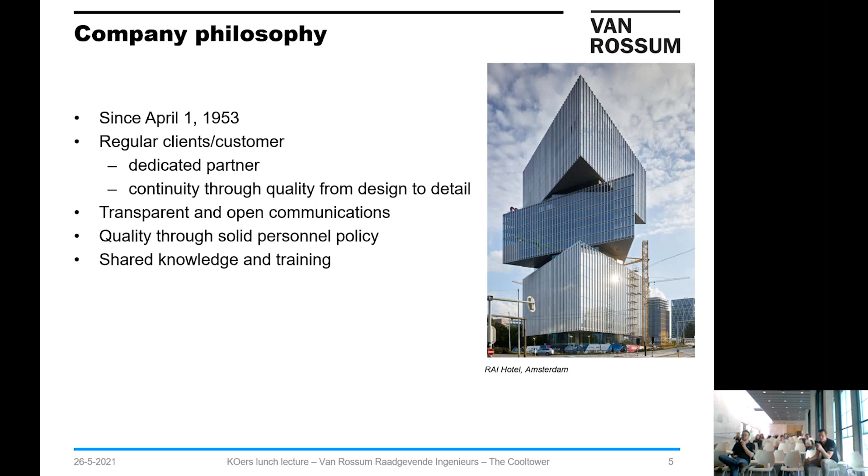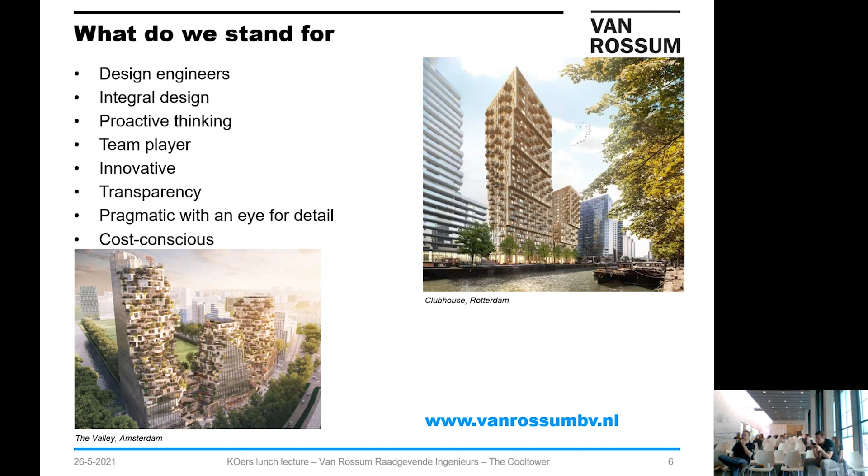In the company we can do trainings, and there is a lot of knowledge to improve and get better in any field you would like in engineering. As engineers, we are doing the full package of structural engineering. We do the design, but we also advise during the construction, and we work together with the architect, with the client, and with all the different subcontractors to achieve the optimum in design, but also in cost and efficiency. If you want to know more, you can go to our website and see everything you would need. And you can always contact people from the company.

My experience. As I said, I come from Greece, so when I started working in the company, I started in English. I got full support from the company on that, and now I do everything in Dutch. We always have young colleagues with whom you can do external activities. You can do drinks. But we also have experienced colleagues where we can always ask questions and learn from. Anything you have in mind, you can ask it, and there will be someone to help you with that.

What I find very interesting at Rossum is that from day one, you can start from the most simple thing, like calculating a beam, or even archiving some drawings, and then the other day you can work on a very complicated tower in 3D and make calculations on that. This variety of responsibilities is very important because you learn a lot in very little time. You have the opportunity to work on many different projects.

For me, for example, when I started working on Ponsteiger, I made the load and stability calculation of the lower part, which was very impressive for me at that moment, and still is. Then I also worked on a school, the Retail Academy. It was an expansion. And also on a villa 250 years old where we did the whole restoration. So you see there are many different projects you can work on and many different skills and knowledge you can acquire from that.

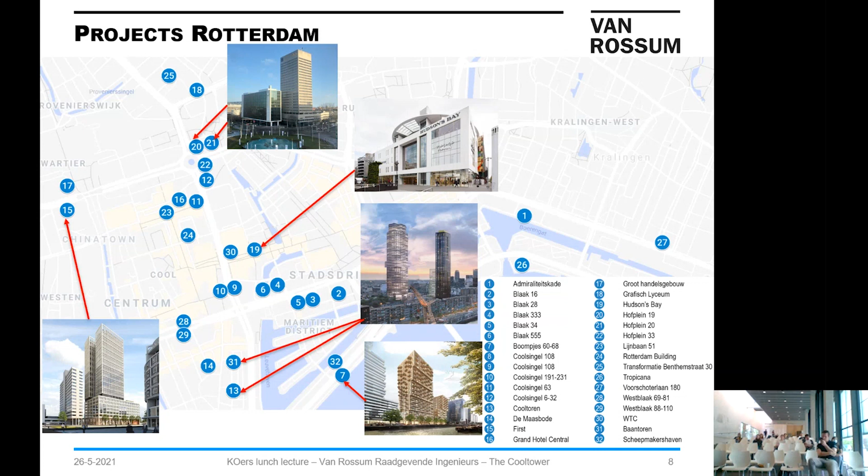And now the CoolTower. The CoolTower, as you can see, has a very interesting silhouette in the sky of Rotterdam. There are different buildings now being built in Rotterdam, and this one stands out because the form of the facade and the form of the building is different. You can also see that the facade starts from the top and from the lower part as light, thin elements, and ends up in the middle with thick elements.

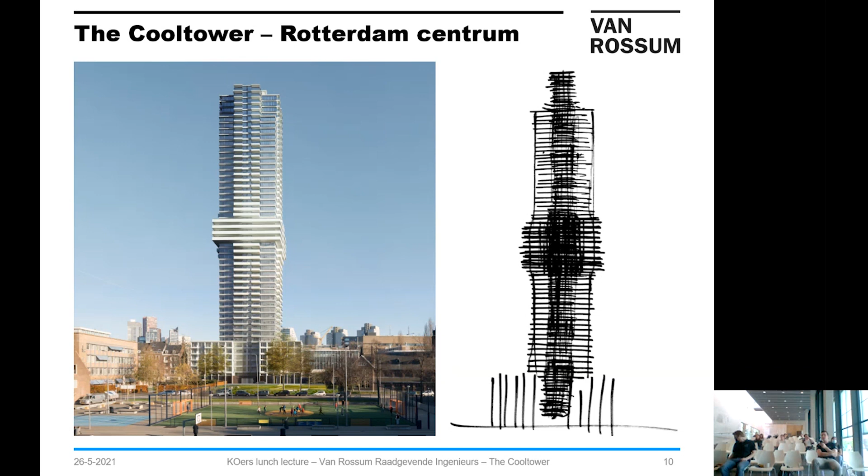And this was actually the goal of the architect. This is the first drawing of the architect, in which you can see that it's very dense in the middle. The idea is that the average height of the high-rise buildings in Rotterdam is around 75 meters, and this is the middle part. So he created there a sort of point of reference for the average height. And this is actually being built, and he achieves that through the thickness of the balconies.

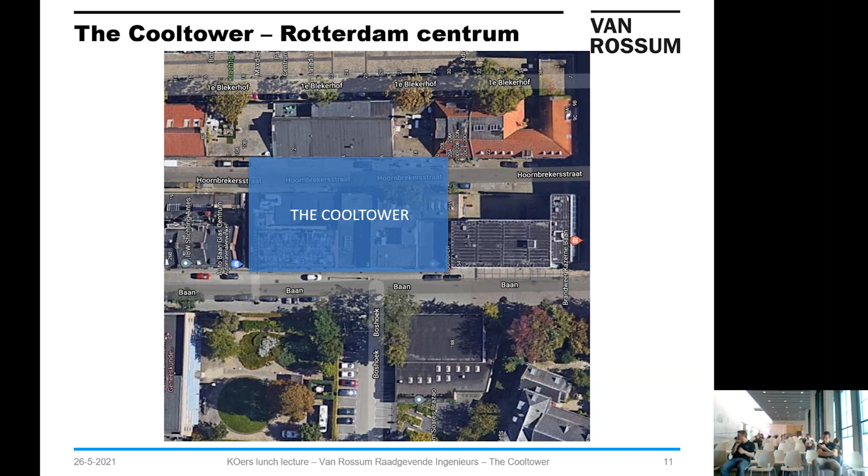It is located in the area Cool in Rotterdam. That's why it's called the CoolTower, besides being a cool project. It's between the streets Baan and Hoornbrekerstraat, and you can see that it's above Hoornbrekerstraat. So there was a need to create a construction, which we're going to talk about very soon, to transfer the loads above the street. The area is now being really developed, and there will be many different developments in this area. You already know that we're also going to make the Baantoren. It's next to the CoolTower, and the area is going to change completely.

And at Rossum, in every phase we always work with one project leader, one structural engineer, and one draftsman modeler. But these people change in every phase. So 4 years ago, when I started with the project, I was doing the calculations, and now I'm doing the project leading during the construction phase.

Some data of the project: it is a residential building. It is made out of concrete and steel, mainly concrete, but there are also some steel elements that are main structure. Total height is approximately 155 meters. And the completion date is mid 2022, and now they are almost in the middle of the construction. So they have a lot to do yet.

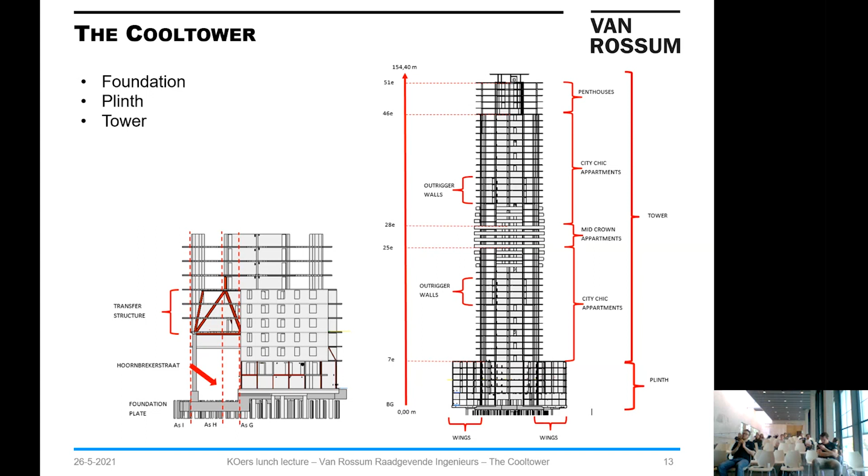The main characteristics of the tower are the outrigger walls, which are part of the stability system. And from the plinth, at the left side, you see the transfer structure I was talking about, which goes above the Hoornbrekerstraat, and it's necessary in order to create a clear path for the cars to go through.

The foundation, you see on the top, the form of the plate is a bit weird to have like that, but it was necessary because at the location of the Hoornbrekerstraat, there are a lot of cables and a lot of installations that we couldn't remove. They had to go on during the construction, so we had to create the pour in this way, and that's why we made this form of the foundation plate, which is 2 meters thick.

Then you see on the lower part all the piles, which are placed in the whole foundation. There are in total 167 piles. Most of them are in the middle part, in the foundation plate, and there are 3 left and right at the wings, which are the parts that are cantilevering from the tower.

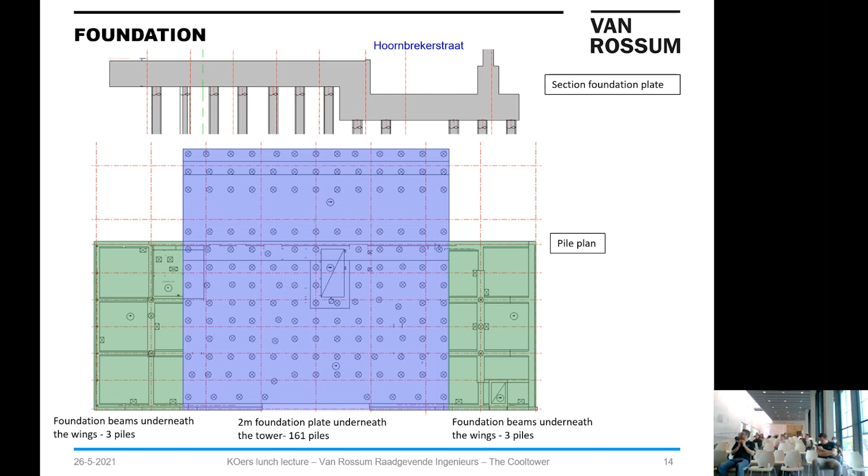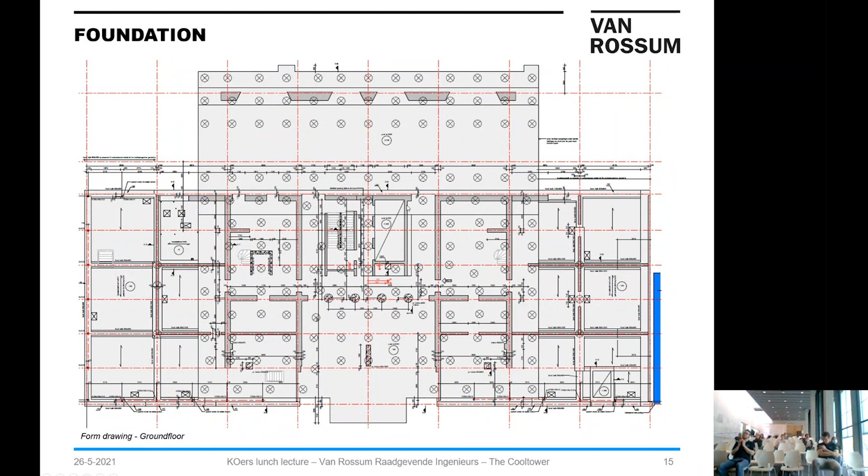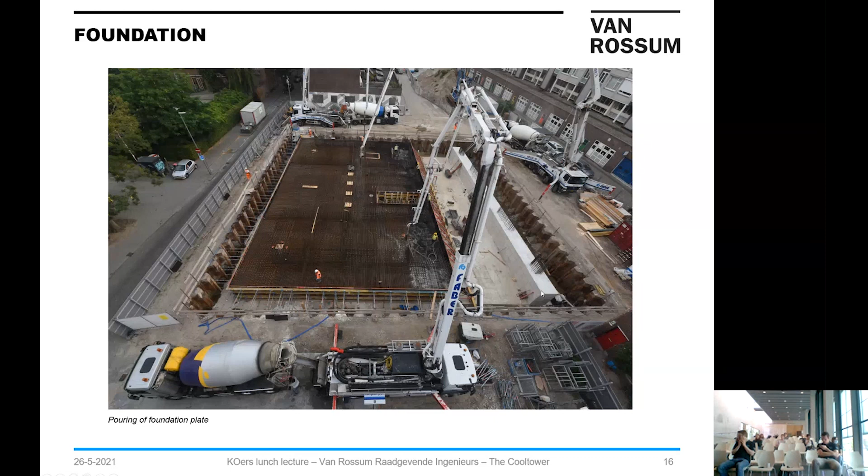Some facts: the concrete foundation is 2 meters thick and it's 31 by 31 meters. In total, 167 piles, as we said. It has a pile length of 55 meters, which is almost 1/3 of the building also in the ground. You see here the analogy in the height. And the load capacity of every pile is approximately 8,000 kilonewton.

Probably my colleagues already know that, but I don't know if the students understand the amount of this mass that comes on a pile. But I made a small analogy, and you can see here that a fully loaded Boeing is around 300,000 kilos. So a pile can support approximately 2.7 Boeings. So you see, every pile takes an incredible amount of loads.

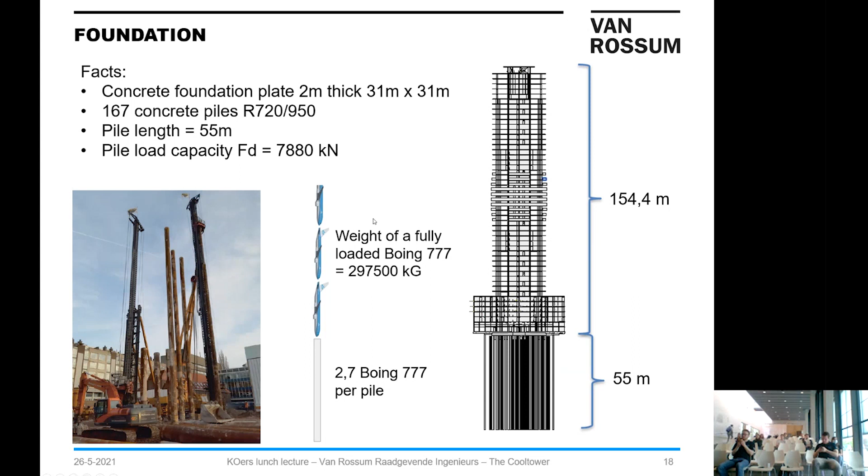We move to the plinth. The goal of the architect was to create a facade where you could see that the left side and the right side are different, and the idea was he wanted to keep the same form from the previous construction, and he actually achieved it.

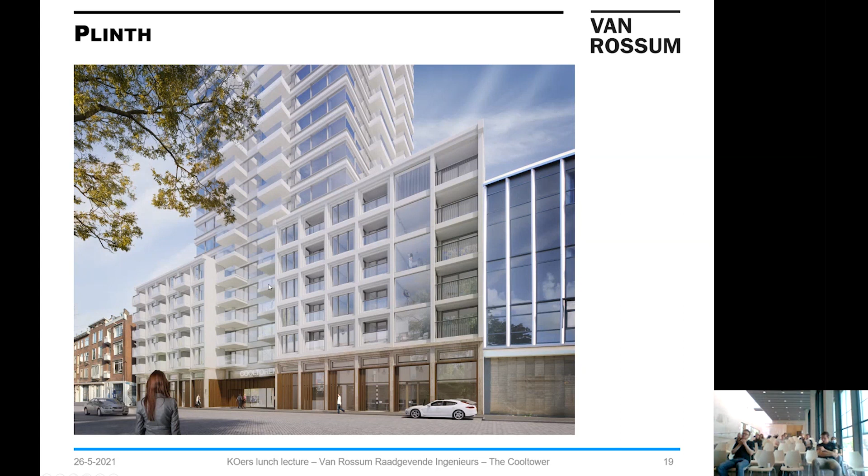Here's what I was telling before. So we have on the left and the right the wings of the plinth, and through the cantilever walls, which are the green ones, they are connected with rebars through the walls and through the floors, and they are hanging from each other. So they are holding themselves in place, so they will not collapse.

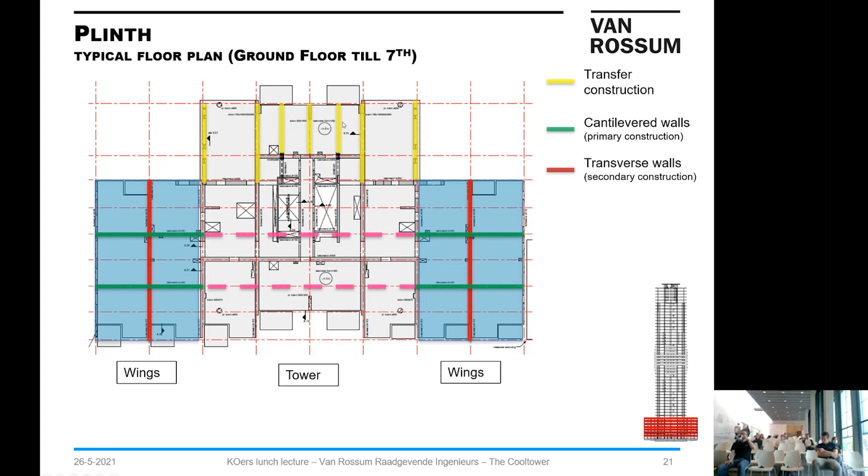And the idea of that was because we didn't want to have a difference in the deformation between the tower and the plinth, because the tower is 50 floors and the plinth is only 7 floors, only 21 meters tall. So there will be a difference in the deformation, and also we didn't want to affect the buildings next to the plinth, and that was the solution we found, and it solved this issue.

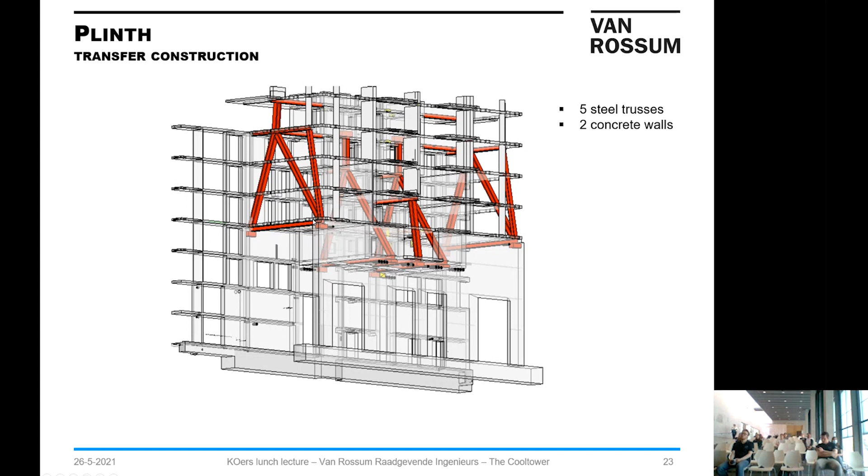This is the transfer construction we discussed before. So you see there are trusses that come above the street, and they take all the loads from the columns and bring them left and right to thick walls, so that we can have access through the street. The main idea of the structure is that it takes the loads from the columns and transfers them to the walls. This is how it works in the normal situation.

But we also did research, and it's necessary in this kind of building, on how the trusses will function if one part collapses. So in this specific case, if this beam collapses, we see how it's going to transfer the forces to the tower on the top here and on the bottom, and then we had to reinforce and calculate the elements based on these forces.

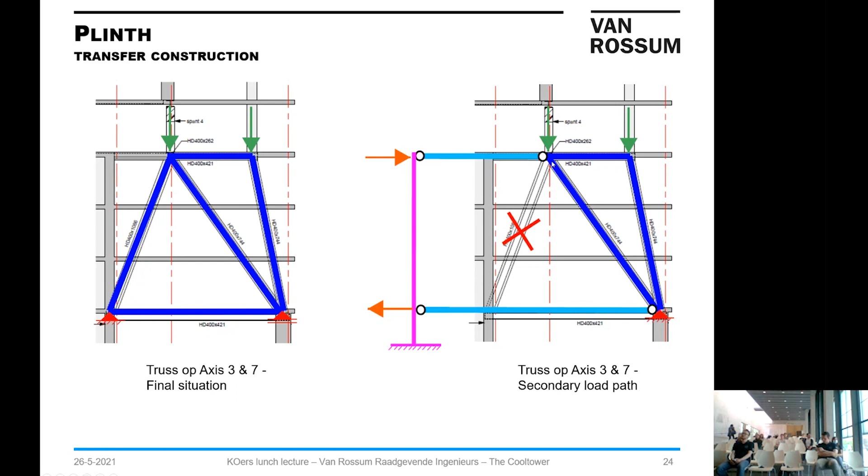So we also have to think about these scenarios during our work, not only about just making calculations of the normal situation, but also what happens in case of accident, what happens during the construction phase. All these kinds of parameters, we take them into account.

One nice part of our work is that we can design it ourselves, and we can see it being built. That's what I find very pleasant and very satisfying, when you have worked really hard and really enjoyed it, and you can see this being built and you enjoy it.

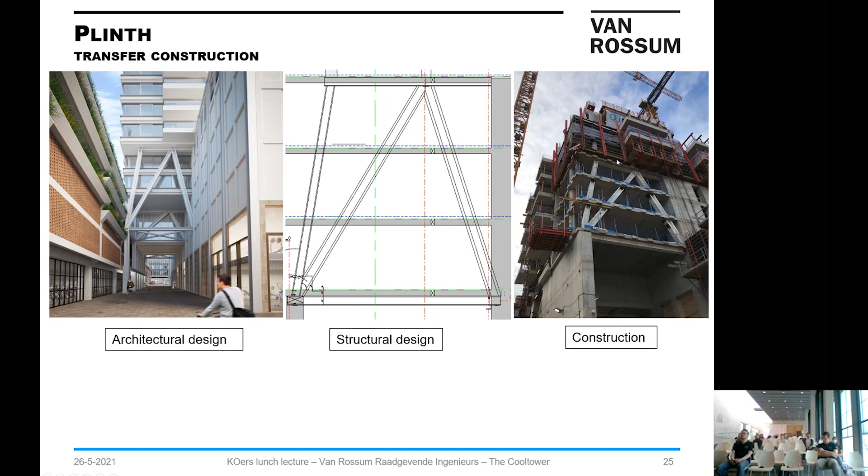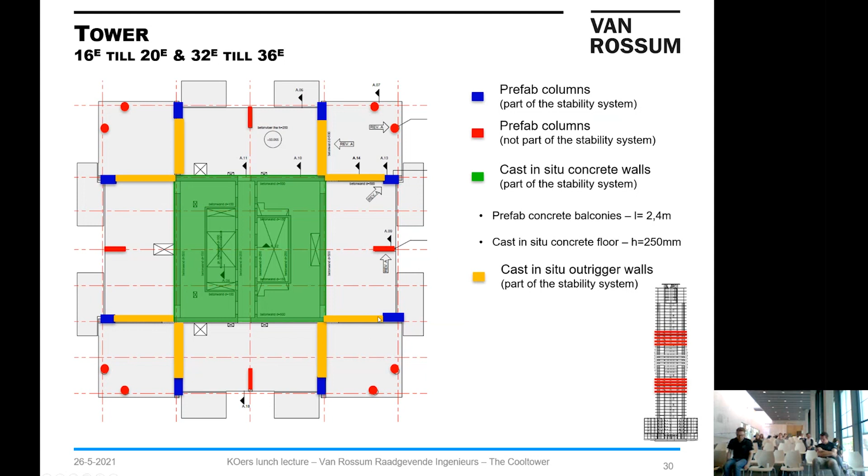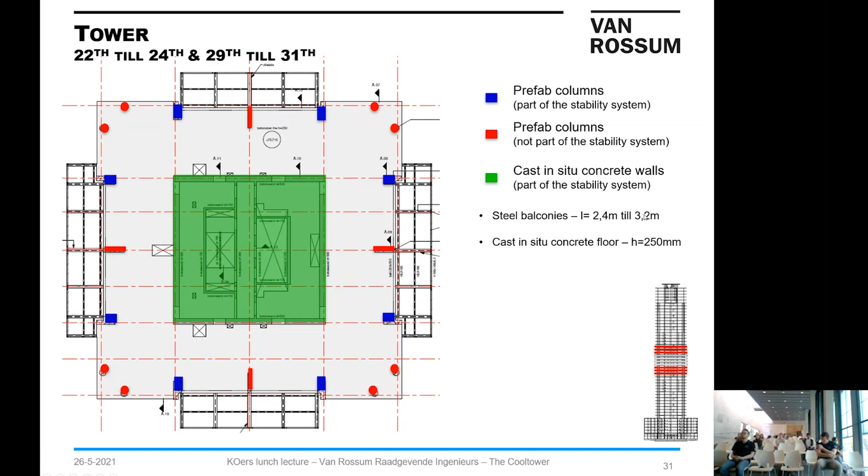As we go higher in the tower, you see these are the levels with the outriggers. Here, the yellow ones are the outrigger walls that are used for the stability system. Then we reach the middle part where we have the mid crown, that's how we call it, and above and below the mid crown there is also a different floor plan where the balconies become steel because of the length of the balconies. It wasn't possible to make them in concrete, so we decided to make them in steel. And the rest of the construction remains the same.

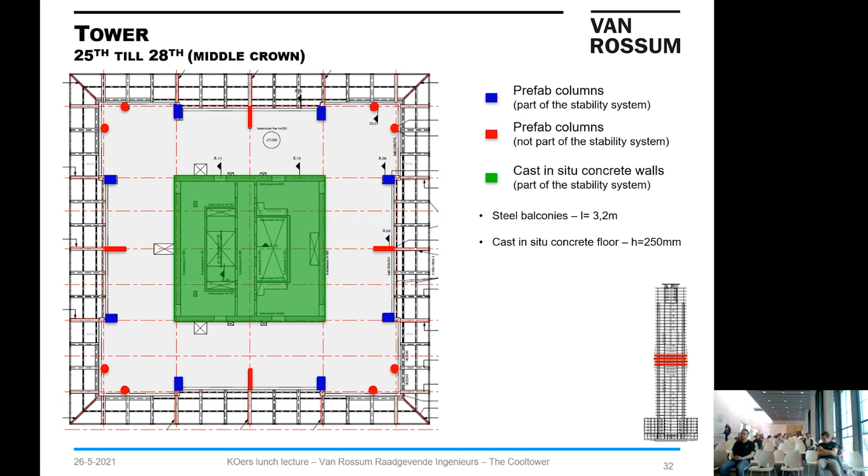And then here we come to the middle crown, which was the main idea of the architect, to create this kind of ring around the building, so everybody can see this dense line in the middle of the construction. Again, because of the length of the balconies, 3.2 meters, we had to make them from steel. The difference is that in these floors, we had to add extra beams on the edge of the floors in order to support the balconies. But further, the construction remains the same as the floors below we discussed.

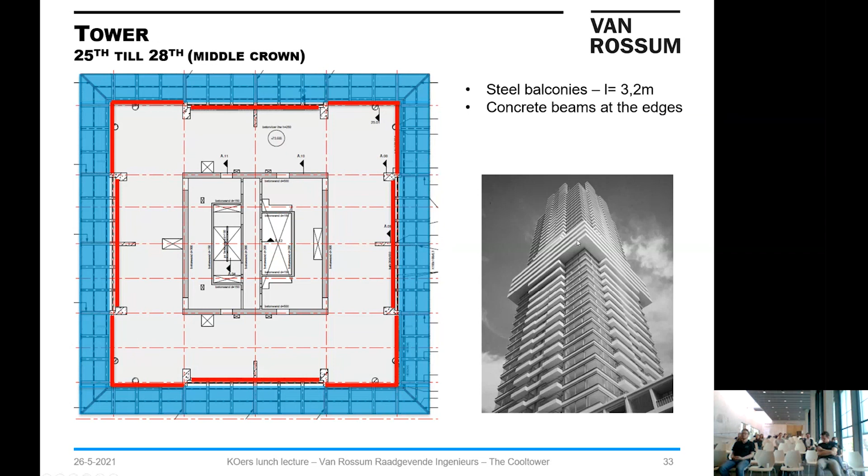Above the outriggers, the columns are not stability elements anymore, and that's why you see that they also become much smaller. They also don't take so much load compared to the lower ones, so the dimensions are getting smaller, and that's also good for the contractor and the client, because we also think about that. We have to think about how to make it smaller and more efficient. That's the idea behind this. And you see that although the form remains the same, you have many varieties and many differences in the construction.

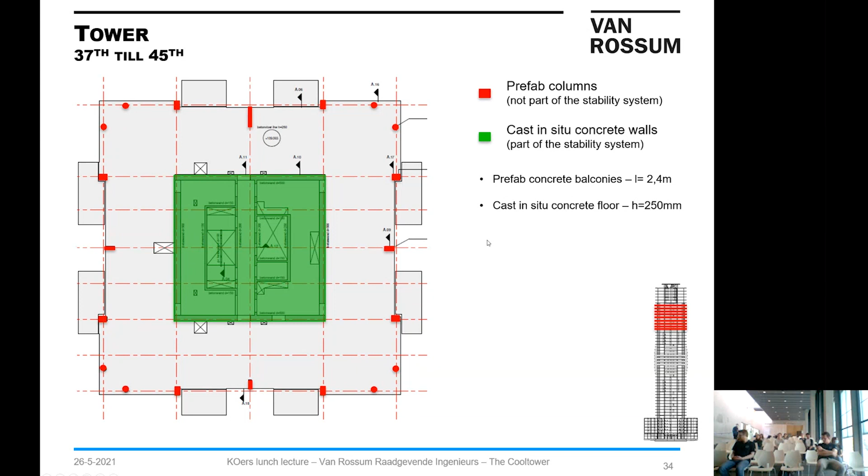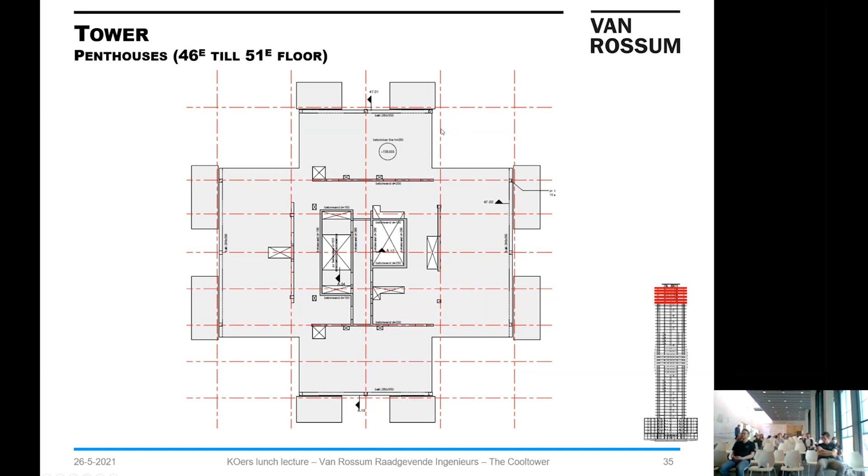On top of the tower, we have the penthouses, and here the form changes completely. And also the structure changes, because the columns are not taking any stability loads, but only the walls, the prefab walls in the middle, are taking the stability loads.

And these are actually, in my opinion, going to be the most beautiful apartments or penthouses in Rotterdam. If you see the designs inside from the architect, it's going to be very impressive.

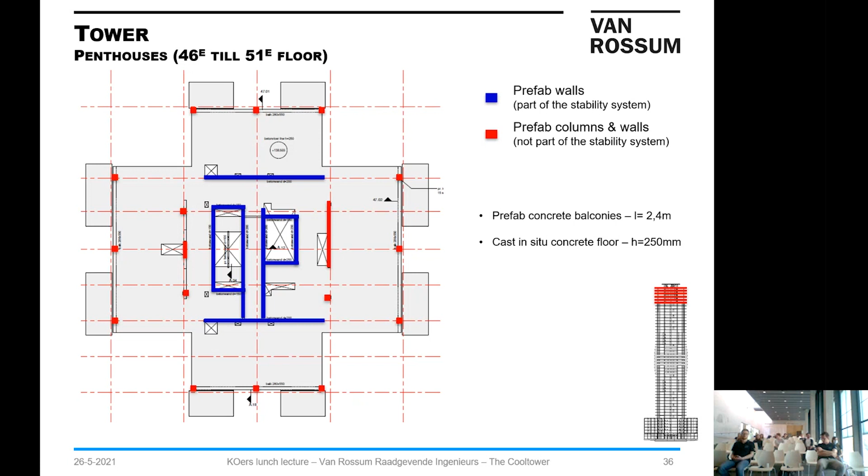So since we made the design, and since we made all the elements, and we know what we're going to do, we use SCIA models to calculate the forces, and of course control our options and see if what we designed and decided is correct.

And we have two main models in SCIA. One is without the influence of the ground, and the second one is with the influence of the ground. The reason we make this separation is because we want to see what's going to happen because of the deformation of the ground after 50 or 60 years. Because as you know, the ground in the Netherlands is a bit weak, so we need to take this into account in order to design our structure.

And then on the first model, we made 3 different separations in order to check the different elements and different situations. So in the first one, we assumed that the columns have the same stiffness as the core walls. We made another model where the columns are stiffer than the core walls, and another one where the columns are the same as the core walls, but the floor has 10 times lower stiffness.

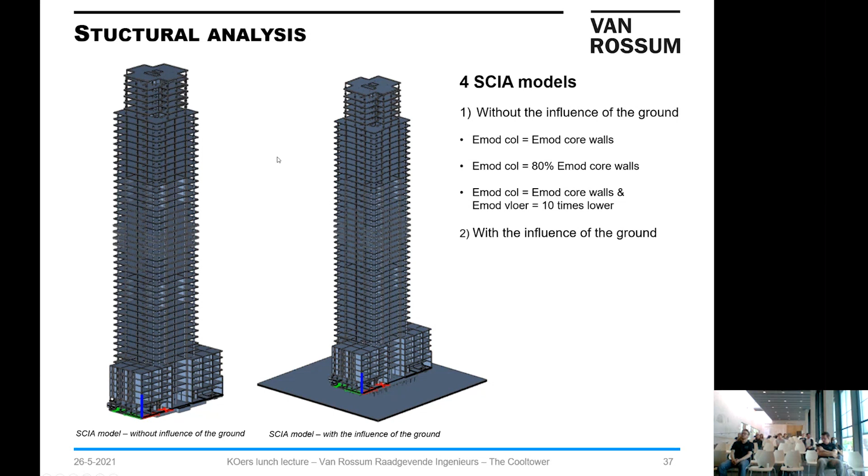All these are happening because we can't calculate with one model all the different situations, and you need to check what's the most important, the biggest force. Based on those models, we took our results, and for example, we could calculate the deformations of the building. Here you see deformations in the x direction from the wind.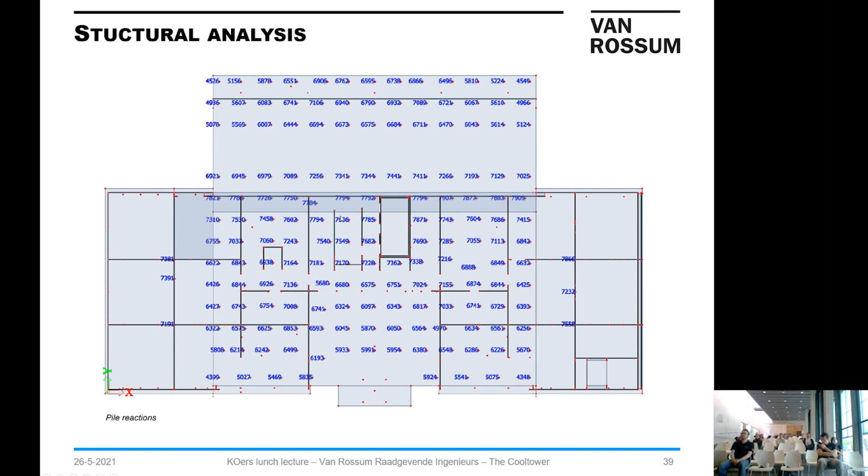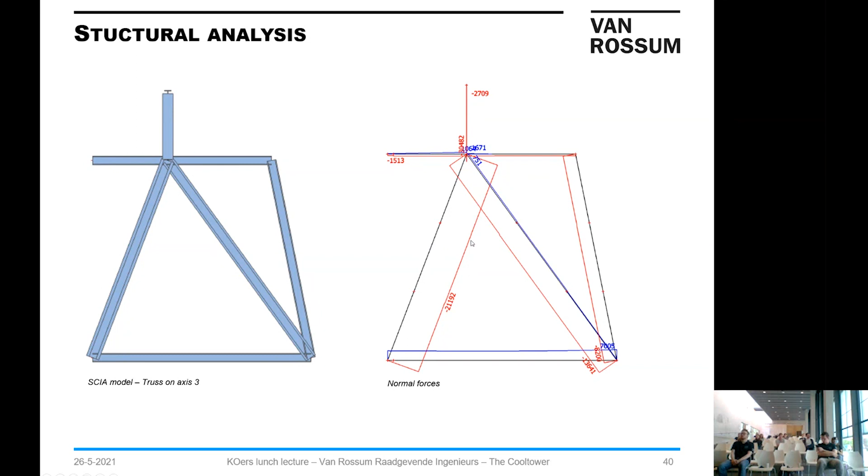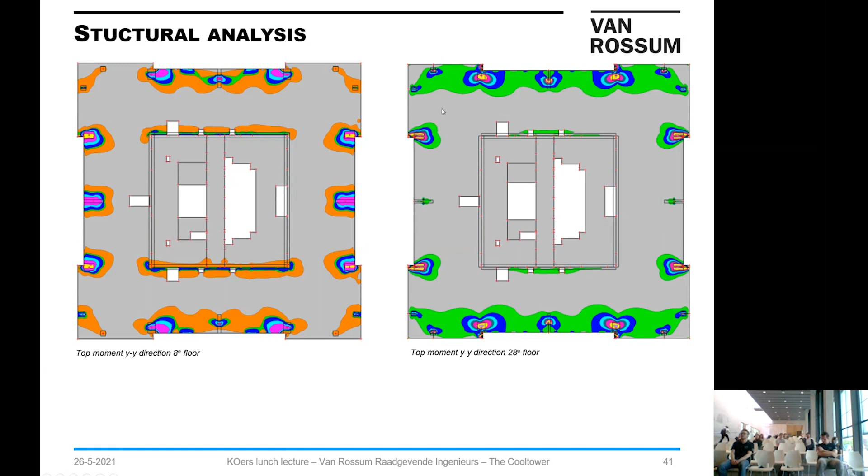Are there any questions? Thank you, Alexandros. Does somebody have a question? Well, at least I have a question.

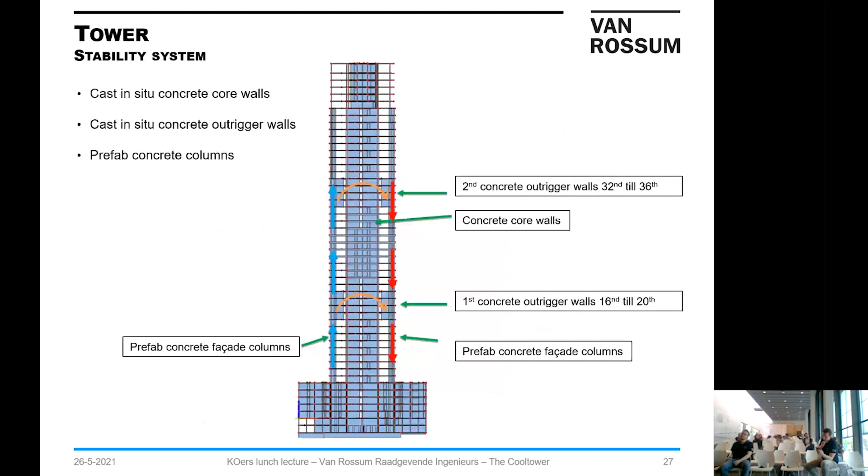You were talking about the wings at the bottom, which are basically cantilevering from the structure. Yeah. Do you feel like you used a large amount of extra concrete compared to a conventional method where you just use piles to support these parts in a normal way?

Not concrete, but steel, because we had to use extra steel to make this connection in between the walls. But in terms of concrete, it would actually be the same amount; they would be the same dimensions. The dimensions of the elements wouldn't be different. But in steel, we had to use extra because when you cantilever, you have more tension in the construction.

That was a good question. I also have a question about the buildings next to the CoolTower. How much influence does the construction have on them, so that they might settle more? Exactly, yeah, because that's the reason that we kept this distance. So at the moment, there is no influence on the buildings. Otherwise, they would have it now in the middle.

The deformations are approximately 6 centimeters in the middle part, and on the sides they go to 3 centimeters. So you can imagine, furthermore, there is no effect on the nearby buildings. That was the reason for doing this kind of construction, because we are building in the middle of Rotterdam, and everything is too close to each other. So we had to make a solution for this construction.

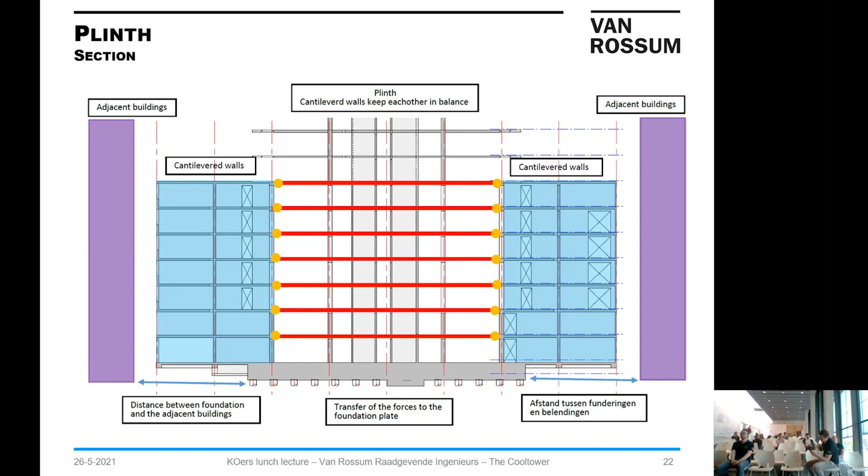I have another question. You showed at the start that your team was about 3 people. How is it to work on such a large project with such a small team? That's a good question, maybe. The thing is, when you're in the beginning of the design phase, you're actually also the project leader and the structural engineer and make calculations. And so it's working pretty efficiently.

During the construction phase, where you need more calculations and more production of engineering, more drawings, there may also be an extra engineer, an extra modeler, but this depends per project. Normally we try to keep the teams as small as possible, because then the information remains in the same team, and everybody knows the projects themselves.

Although I'm doing other projects at the same time, as everybody in Van Rossum, we try to keep the teams the same during the whole process of the project. It's a lot of work, I can admit, but it's also very, very interesting and very challenging. Okay, thank you.

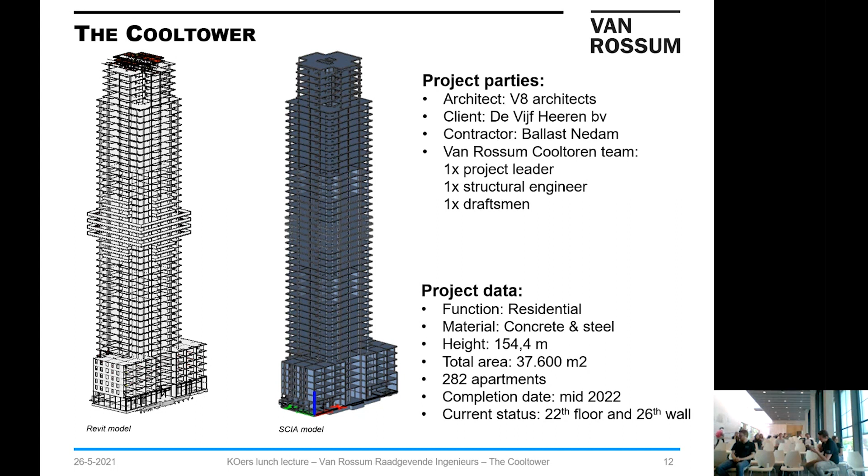I have a question again. Why do you use columns instead of walls? Is that to improve the flexibility of the structure? You mean on the floor plan? Yes. So actually that's a good one, I didn't mention it. The vision of the architect was to create the most open facade possible. So he wanted a really light structure in the facade, so that the views will be free from floor to ceiling.

That's why we decided to use the columns and focus the stability in the core. In this project there were different designs in the past, also designs with walls in the beginning, but we didn't go on because the wish of the architect changed. So we had to collaborate with the architect to realize his vision on this project. As I said in the beginning, we work a lot with the architect from the first moment, so that we can achieve the best result and don't have any surprises at the end of the project.

And you see, we try to make the columns as thin as possible, so that there are really open spaces for the users. That was the reason for the columns. Okay, thank you. Does somebody else have a question?

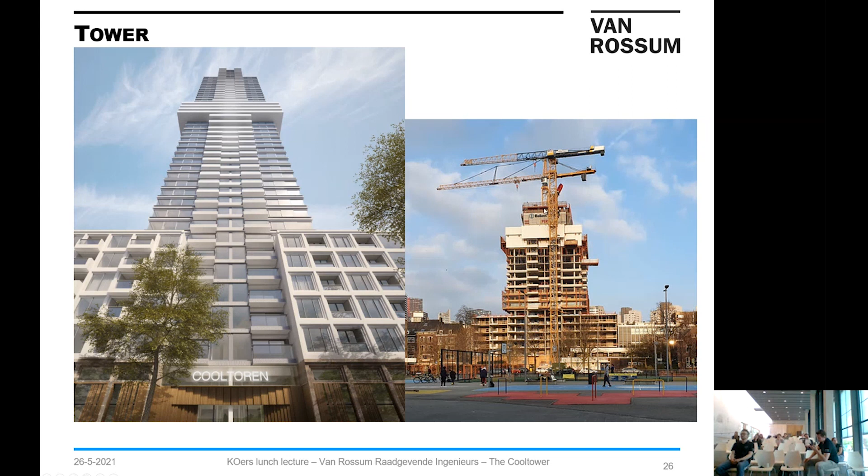They are built first, and the floors follow afterwards. So there's a difference of 4 floors between the walls and the floors. They decided to use this system, and for the columns, in order to make it faster, they used prefab elements. But for the core walls, it was just a decision of the contractor to use this system to build. So there too, we have to collaborate with the contractor to find an optimum solution, how to make it faster and more cost efficient.

So we are always in between in the project, especially in this kind of project where the structure plays an important role; we have to collaborate with all the parties. I hope this answered the question. Okay, thank you. Does somebody else have a question?